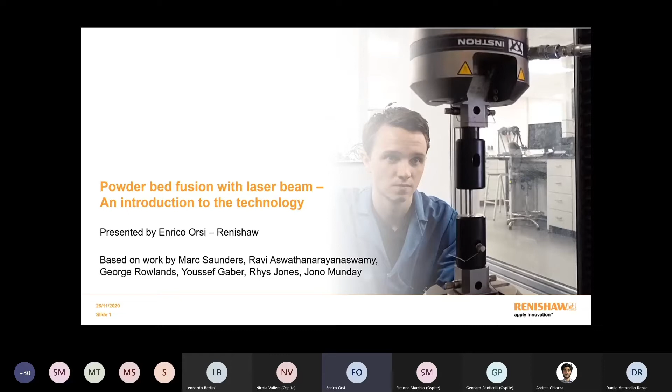I'm presenting this as a representative for Renishaw within Italy. However, this presentation is based almost completely on work made by other people, so I don't want to take credit for work someone else did. I specify that this is based on work by these colleagues shown in this slide, in our offices at the headquarters in the UK.

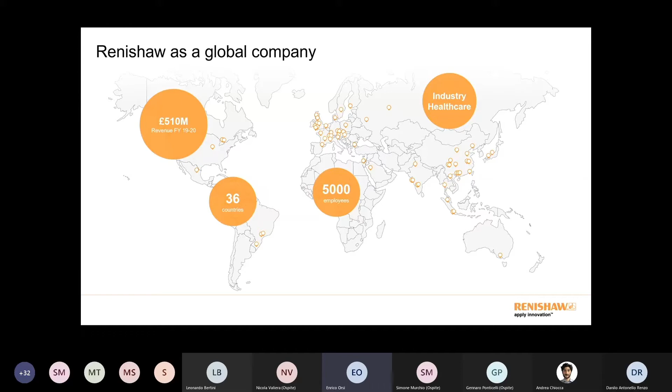Most of the activity we do at Renishaw is based on improving efficiency and quality of processes for customers. So we make devices, machines and systems that help our customers both in industry and in healthcare improve their processes and medical procedures.

Regarding additive manufacturing, we started in 2011 by purchasing a company that was already building machines, which became one of our divisions. When we talk about additive manufacturing at Renishaw, we are involved in metal additive manufacturing, and the technology we use is laser powder bed fusion. This means we have a machine with a process chamber, where powder layers are distributed on the powder bed, and a laser is used as an energy source to melt this powder and create solid objects.

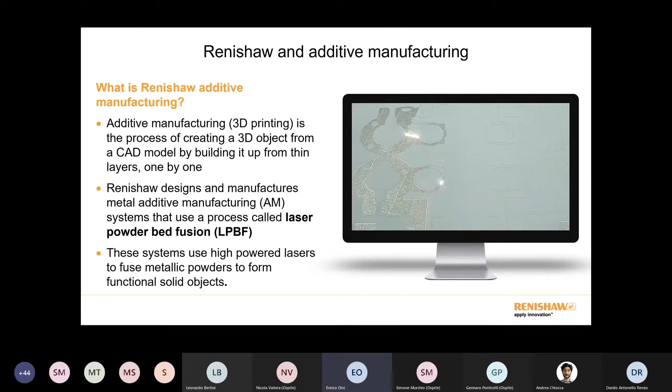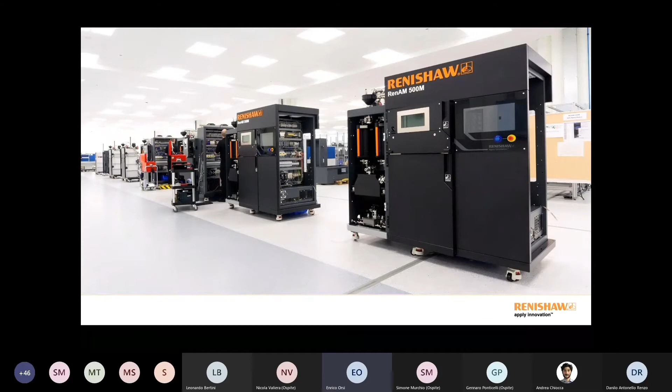In the general additive manufacturing ecosystem, our role is as machine manufacturers. We don't make parts as a third-party provider. We sometimes use additive manufacturing for our own production, but our main role is making machines that are used by companies worldwide to run additive manufacturing processes. This is a picture of our manufacturing line in the United Kingdom.

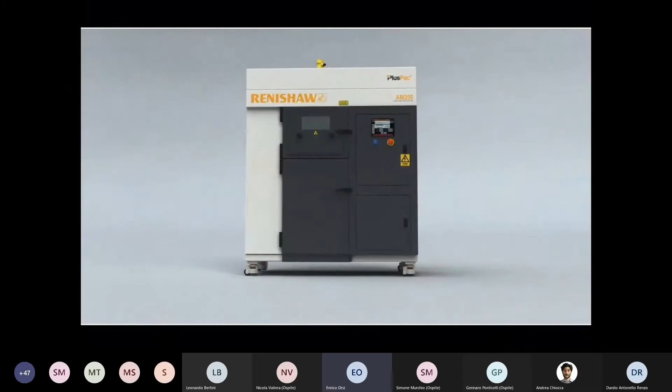If you look at one of our machines, here I have an animation showing the general operation of one of our machines, for those of you not completely familiar with the process. You can identify several functional blocks.

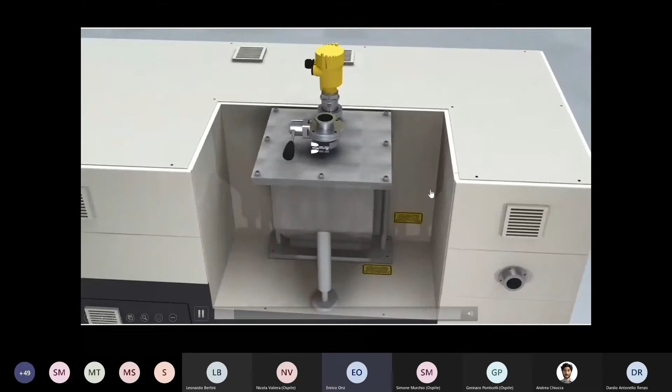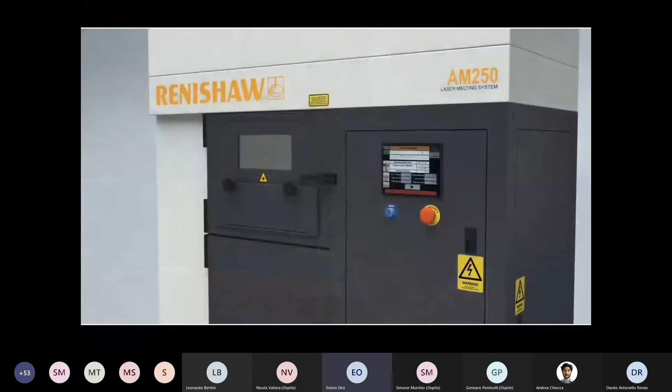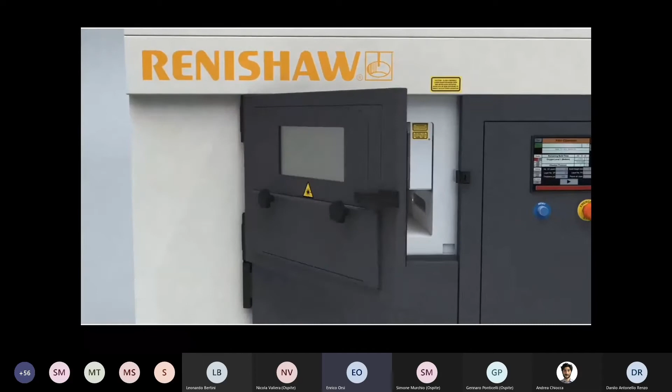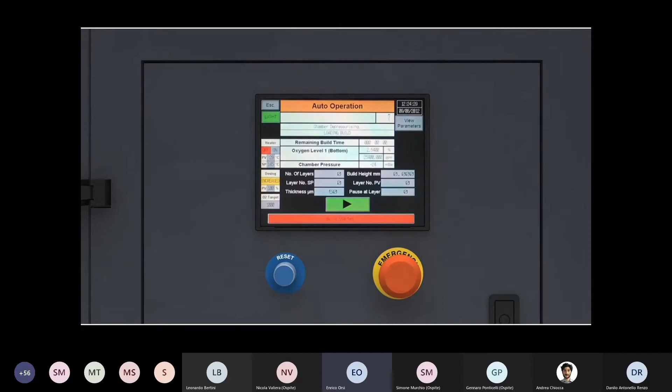At the beginning of the process, when a user starts to build a part, a plate is inserted into the chamber of the machine. There's a software procedure which includes orienting the part, inserting supports, and slicing the part into several very thin layers, as we'll see further on. Then the operating file is loaded onto the machine and the process is started.

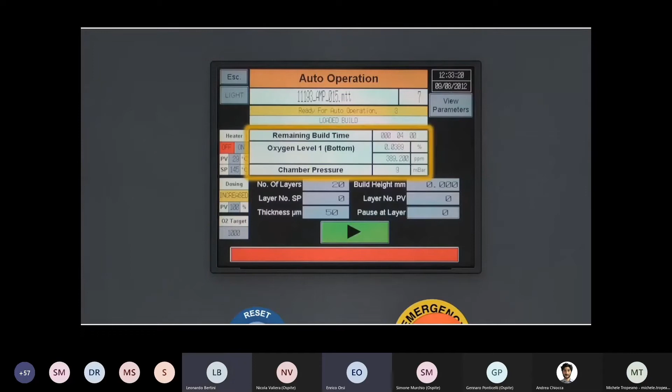The first thing the machine does is remove the oxygen from the process chamber - that's something we specifically do, one of our patents, to clean the atmosphere within the process chamber in the best possible way, and we insert the inert gas. All additive manufacturing machines using laser as an energy source use some form of inert gas. What is specific to our machines is that we create a vacuum inside the machine before inserting the inert gas. Then the machine will start spreading powder and melting with the laser.

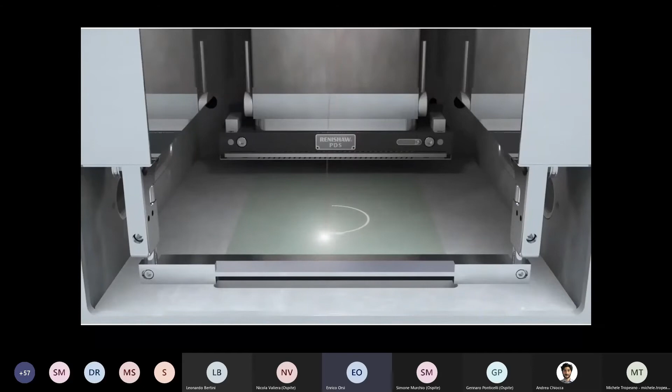The powder that comes from the hopper at the back of the machine is deployed on the powder bed and then spread with this part that we call the recoater. Any additional powder we spread, to ensure we properly cover the powder bed, will end up in the powder recovery slot at the front of the machine.

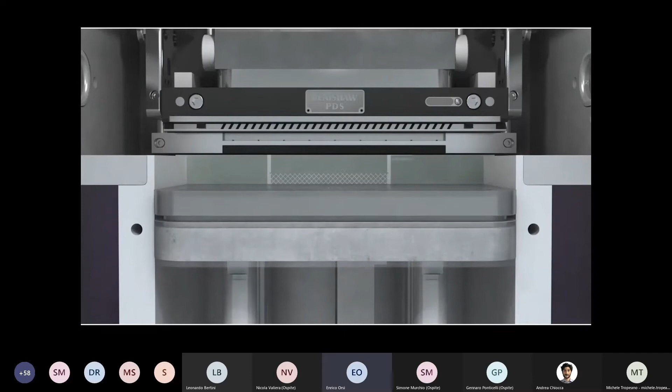During the operation, we have a platform that is effectively the z-axis of the machine, moving downwards to give the part its vertical height and dimension. All the powder used during this process can be recycled.

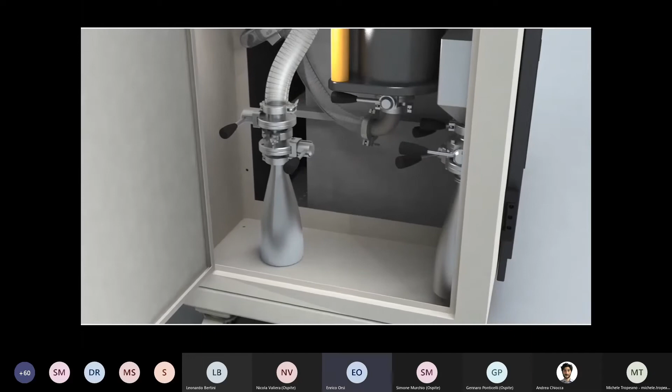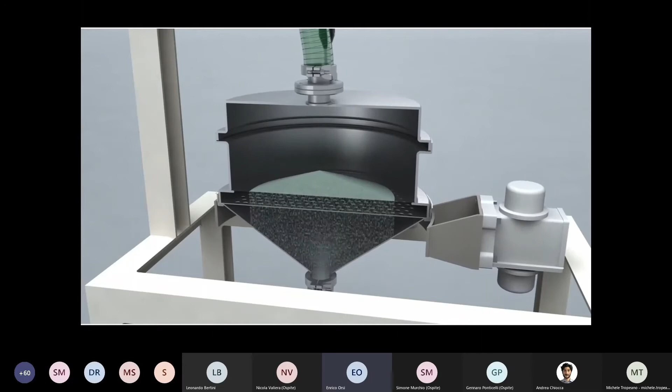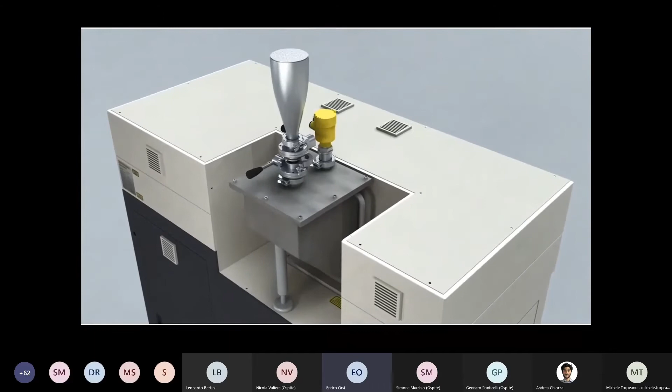The powder that is not melted into a solid piece naturally ends up in one of these containers that are then taken to a separate sieving device that cleans the powder by sieving it. What we're showing here is the operation of one of the more manual machines that includes a separate sieving step outside of the machine.

Some of our machines also include internal sieving built into the main device, so this operation is not needed anymore. Those machines are meant more for a production environment rather than a research and development environment.

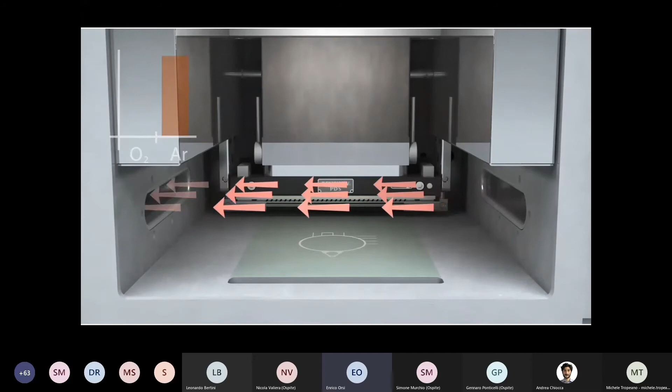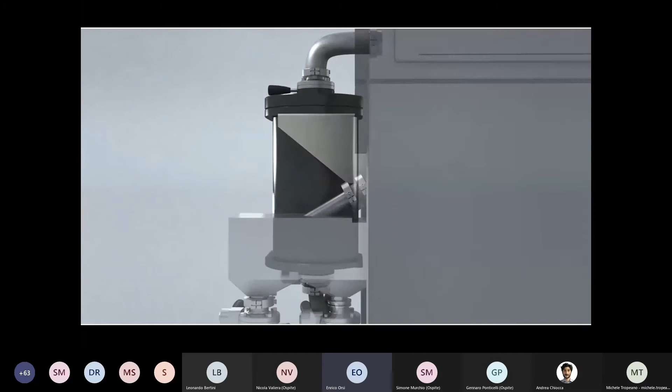As the process continues, deploying other layers of powder, we also have a very important part of the process, which is the gas flow that is continuously cleaning the process chamber from sparks and emissions coming from the process. This is essential to make sure that the laser power is deployed and reaches the powder bed in the correct way. This gas flow, which contains metallic particulate, is then filtered through a paper filter and recirculated in the machine.

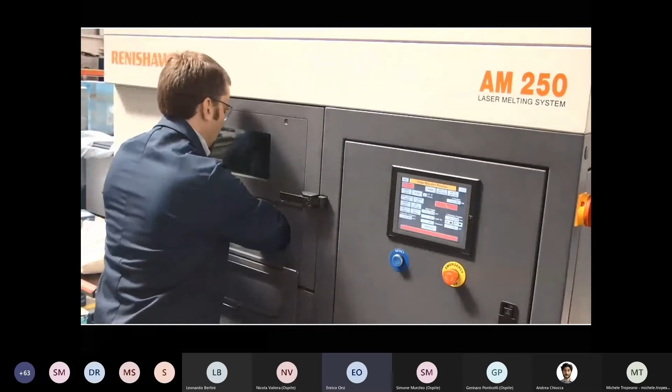So the process continues, and this way each layer is added to the height of the part, ending up in a final metallic device. At the end of the process, the operator, using a glove compartment, cleans out the remaining powder from the machine, sending it to the sieving process, and extracts the plate with the part welded onto it.

Additive manufacturing for metal is a technology that is not replacing other technologies. It's something incremental that will help in a specific way, creating things that could not be made before in an easy way.

The key benefits are the ability to produce complex geometries, making in one single part what in the past needed different separate parts that were then assembled, and creating items and parts that have a considerable reduction in weight, a specific benefit that is very important, for example, for aerospace applications.

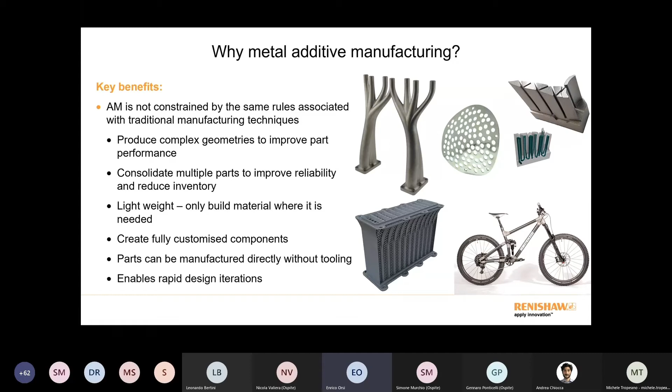There's also the possibility to create components that are fully customized, very important for example for medical applications or high-end consumer goods customization. In addition, parts can be manufactured directly without tooling, which cuts the overall time and cost of the manufacturing process. It also enables rapid design iteration, so you can change a design very quickly and immediately print another part.

Now we're coming to the topic of today's seminar, which is the importance of fatigue in AM materials. In more and more applications that use AM materials as a critical part, we have many benefits because of the lightweight parts we can build, and of course because of the performance of the materials, which is normally higher than traditional materials.

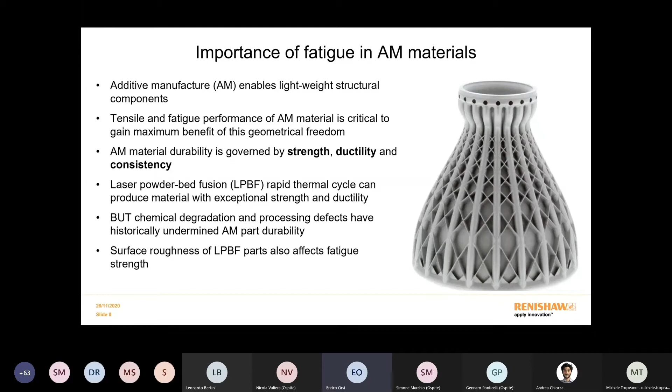However, in some cases the process can generate defects in the parts, and these will strongly affect the fatigue performance. So it's really important to identify these possible defects that can come out as an unwanted outcome of the process.

This is a positive feature of the technology that generally improves the mechanical properties. It will also pose some interesting challenges regarding thermal treatments and the performance of the materials in the long term.

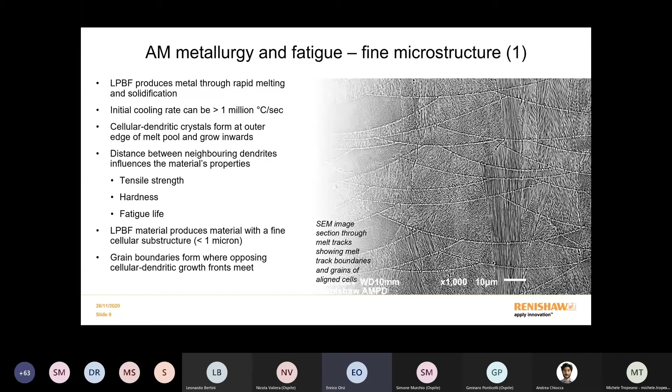In general, we have small melt pools, and the microstructure and alignment of the metallic grains is very fine, specifically in the horizontal plane, while on the vertical plane, due to melting and remelting, we sometimes have elongation of the grain. Anyway, we're talking about grains in the region of 20-30 microns in the XY plane.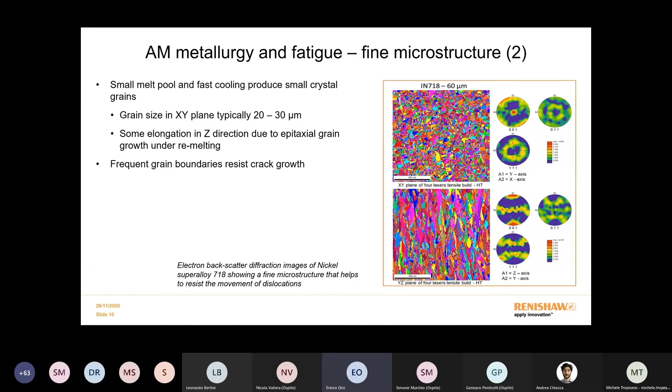Looking at the defects that can arise from the additive manufacturing process, certainly an important point is the chemistry. The alloys we use are very well controlled in terms of oxygen and nitrogen content, because these interstitial elements can insert themselves inside the intermetallic matrix to generate distortions and modify the ductility and performance of the material.

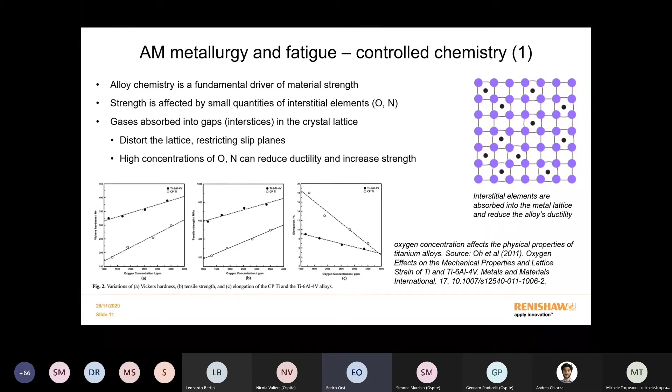In general terms, the insertion of interstitial elements will increase the total tensile strength of the material and the hardness, and will reduce the elongation, so it reduces the ductility of the material.

If we look at how oxygen and nitrogen can get into the alloy, there are basically two ways: either the atoms of oxygen and nitrogen are already included in the alloy itself, or they're taken into the alloy by the process.

We want to achieve alloys with very low content of oxygen and nitrogen to achieve the best possible elongation and resistance to fatigue. However, the environment around us is not helping us, so we want to control the inert atmosphere of the machine to a very tight specification.

In here, you can see what happens. Let me see if I can share my mouse. Go back one slide.

This red line shows a machine that is not behaving properly, so it continues to leak argon, and you have to purge the machine regularly, and you still have a concentration of oxygen that is unwanted inside the inner chamber. This behavior shows a good machine: once you have an initial purge phase, then in the first 100 layers absorption of oxygen by the metallic parts melting over the plate will keep a low oxygen content throughout the build. This is what we're aiming for and what our machines are designed to do.

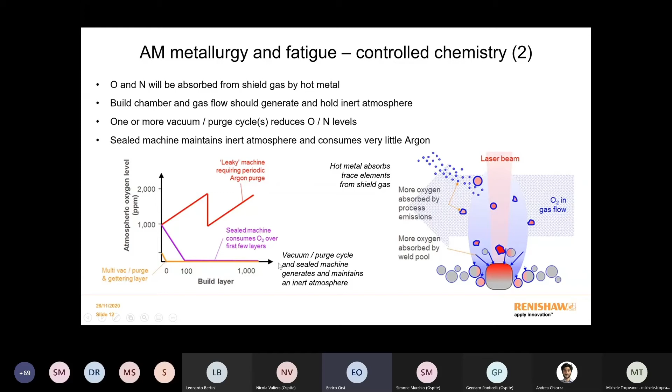Another type of defect is related to emissions from the melt pool that can create defects like this one. You see here about 50 micron dimensions, so this defect is about 150 microns across. If you think about the process, in this horizontal plane, this defect is generated by a spatter particle that has covered the plate and generated a cavity underneath, not allowing the laser energy to properly reach the powder, which is then left unmelted. So you have all sorts of different defects that arise from the process if it's not adjusted properly.

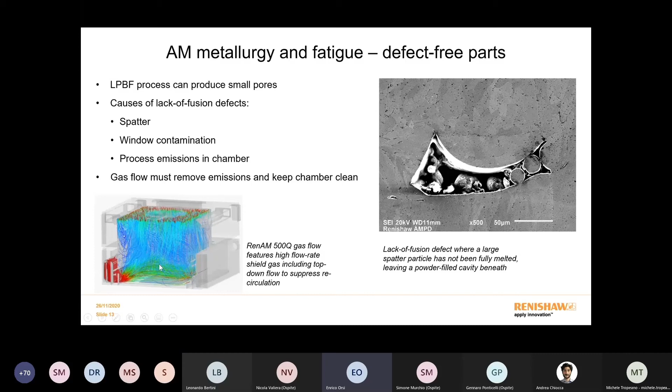Most of these defects will be cured by a good gas flow. Here you see a simulation of the gas flow that moves argon gas vertically in the chamber and then horizontally to remove it from the chamber.

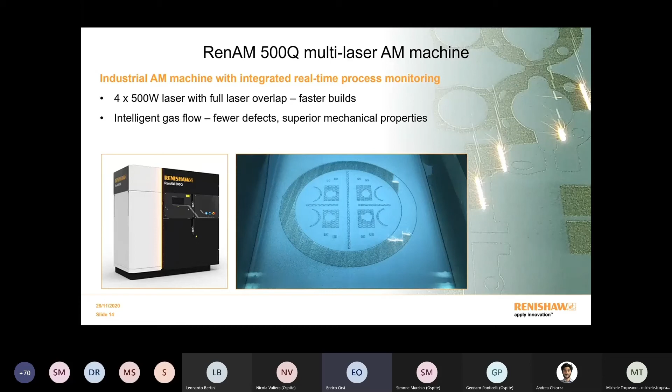Our main production machine has 4 lasers. Here you can see a video of the 4 lasers operating at the same time on a single part. This machine will greatly improve productivity. However, it also poses a lot of challenges to achieve a good gas flow that removes all the particulate from the chamber.

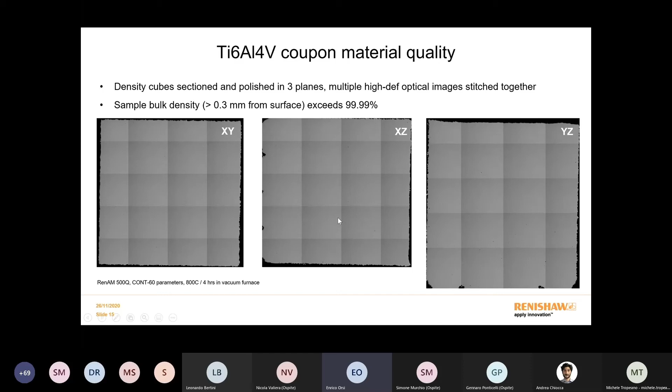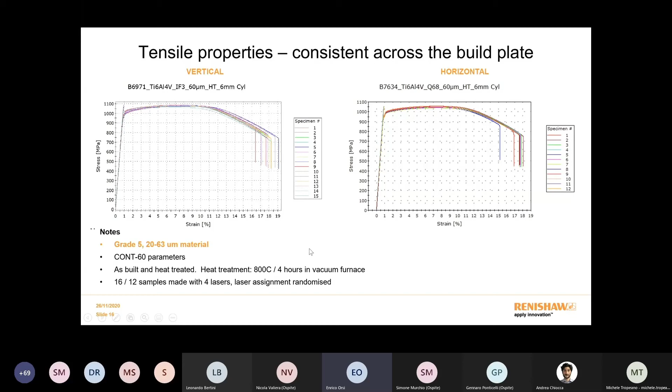A second step is to achieve good tensile properties, consistent all over the powder bed and consistent in time and over different processes. And then you achieve the fatigue properties.

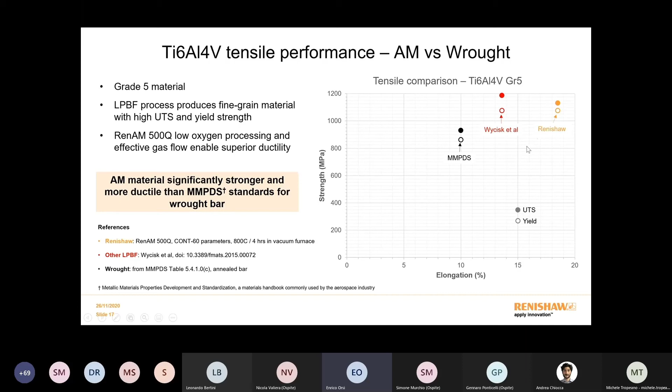If you look at fatigue performance, this is some results we are obtaining, but I will not discuss fatigue results very widely, because many presentations after mine will discuss this in more detail. However, we have some hopefully good results for the future of the technology, because the typical curve for traditional materials is overridden by the curve for our material generated with our process. So we achieve very high cycle fatigue and very high stresses before breaking.

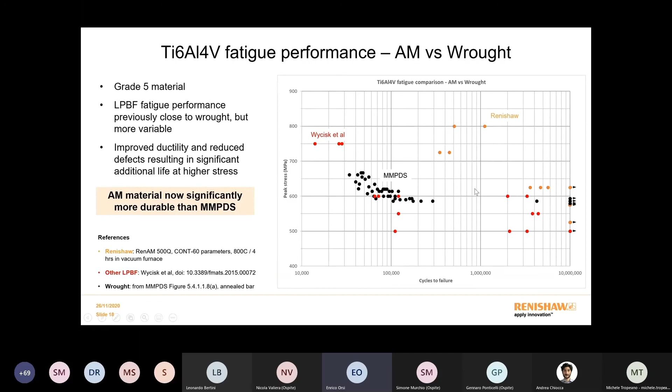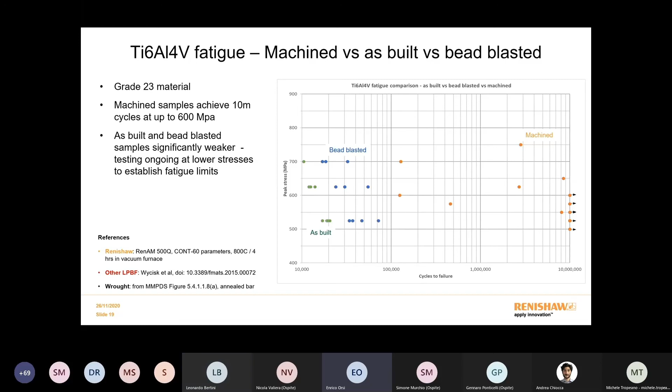One aspect that is extremely important for fatigue in AM processes is the surface finish, as in any process, but specifically because AM will not return parts that have a very high polish surface. Normally, parts that come out of the AM process have rough surfaces with partial powder beads attached to the surface. This will generate a lot of micro notches on the surface that can lead to defects. So there is a big difference between parts tested as-built or after machining. As in some cases parts need to be used as-built, this is definitely a field of research to achieve the best possible surface quality to improve fatigue resistance.

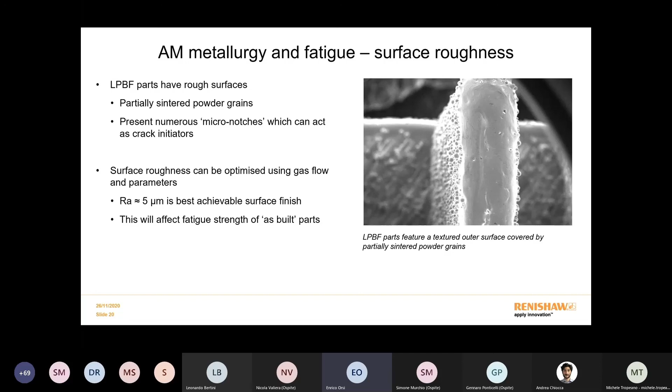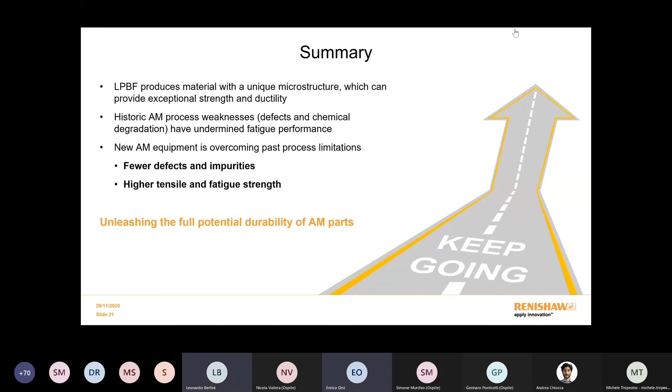I'm slightly exceeding my time, but I'm just summarizing that laser powder bed fusion is a process that results in a unique, fantastic fine microstructure. It can provide very high performance in terms of tensile strength and elongation if done properly. And there is a lot of work to do on fatigue, which is good news for research in the university, because that will greatly affect the possibility to apply additive manufacturing to a lot of processes in the future, especially in the aerospace and automotive industry. So thanks for leaving me this space, and I will return the microphone to the university.